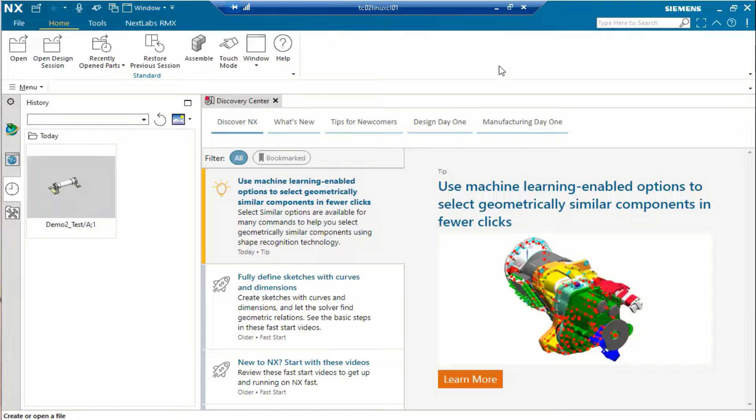Let's proceed to the first use case, where I will demonstrate access control and usage rights for NX files. First, let's look at the demo environment. On this machine, both the NX RMX plugin and SkyDRM desktop application have already been installed. Now, let's start a managed NX from Teamcenter. After NX started, we can see the NextLabs ribbon tab, which indicates that the NX RMX is properly loaded.

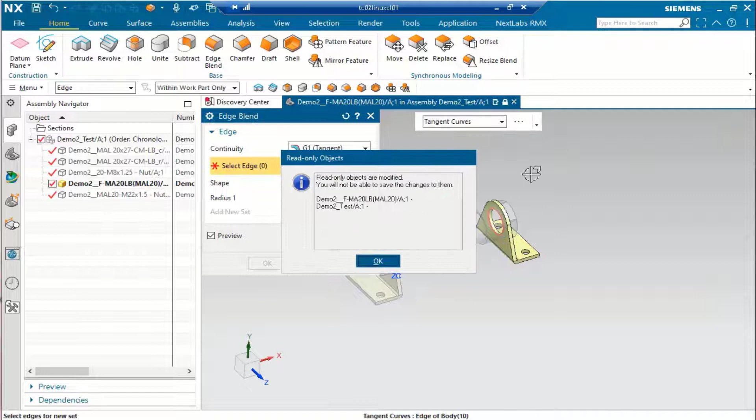The current RMD login user is Ming. I will start by trying to open this super secret assembly. And as you can see, I am denied access. Alternatively, let's try to open a secret assembly. I am able to open this successfully. But as you can see, the part file is marked as read-only and no modifications are allowed. Let's make this file a work part and try to modify it. A message pops up that the file is read-only.

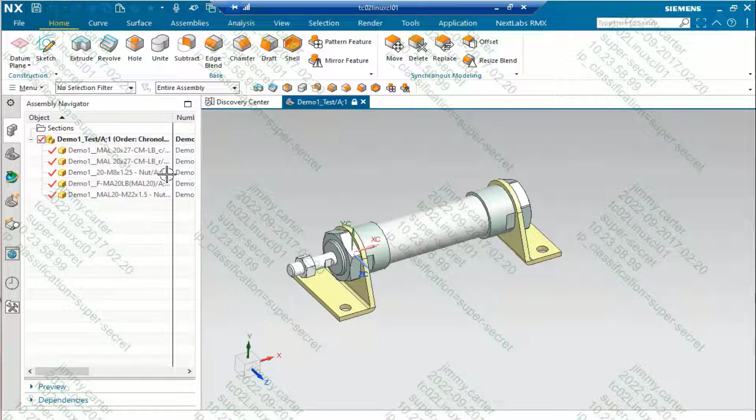To view the classification of the work part, Ming can use the View File Info button on the ribbon tab. As you can see, he only has view permissions on this file classified as secret. Now, let's switch to another user, Jimmy Carter, in RMD. Let's try to open the super secret assembly again. As you can see, it opened successfully. However, Jimmy Carter has read-only rights and can't make any edits. If I try to print this assembly, it will also be denied because Jimmy Carter doesn't have print rights.

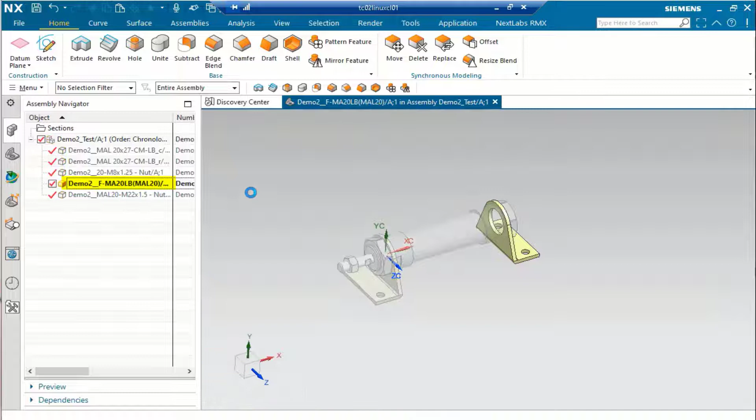The second use case will show retain protection after Save As in managed mode. Now, let's try to open a secret assembly. As you can see, it opened successfully, and the assembly files are not read-only, as Jimmy Carter is able to modify it. Let's make this file a work part and make some modifications. Let's save these changes back to Teamcenter. The save is successful, so let's close it.

Next, if we go to Teamcenter to check the files, in Named References, we will see that the file is updated and remains protected. Let's open the file again to verify the changes and classification. As you can see, the content is updated. NX supports the automatic generation of JT files while saving the assembly back to Teamcenter. Let's save the assembly again.

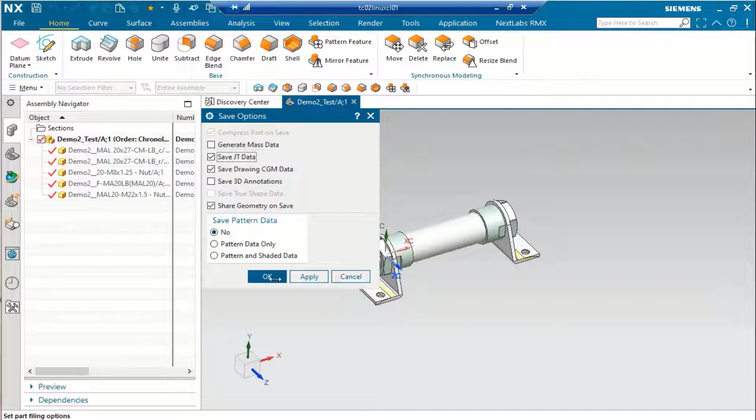In Teamcenter, you can see a new JT dataset has been created. If you go to the named reference, you can see by the .nxl extension that the new JT file is also protected. Let's download the JT file and check the file info. You can see here that the classification will also be inherited from the source assembly.

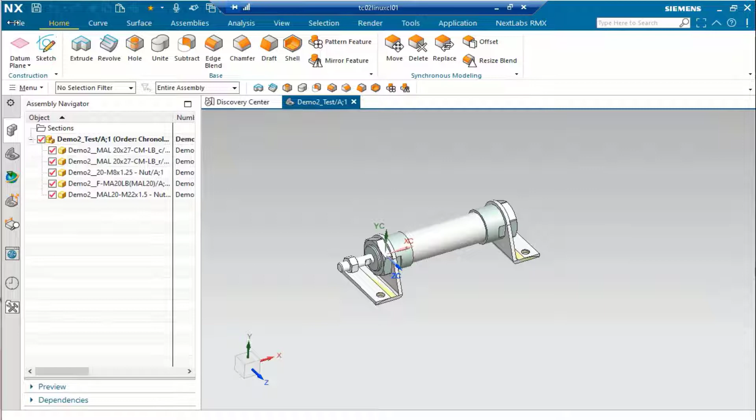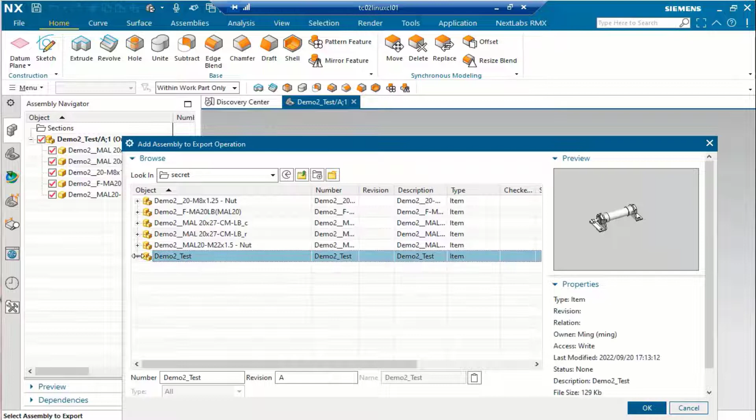In the last use case, you will see how retain protection of the file exported outside Teamcenter works with NextLabs protected files. When a user wants to share the assembly with an external user who has no access to Teamcenter, they can use NX to convert the assembly files in Teamcenter into unmanaged mode. Let's try to export this file outside of Teamcenter. You can also select the protected assembly in this dialog to export. I will then click OK to export.

After the export is completed, in the destination folder, you can see the exported files are all protected as indicated by the .nxl. With this, we conclude our demo on NextLabs Rights Management extension for Siemens NX.